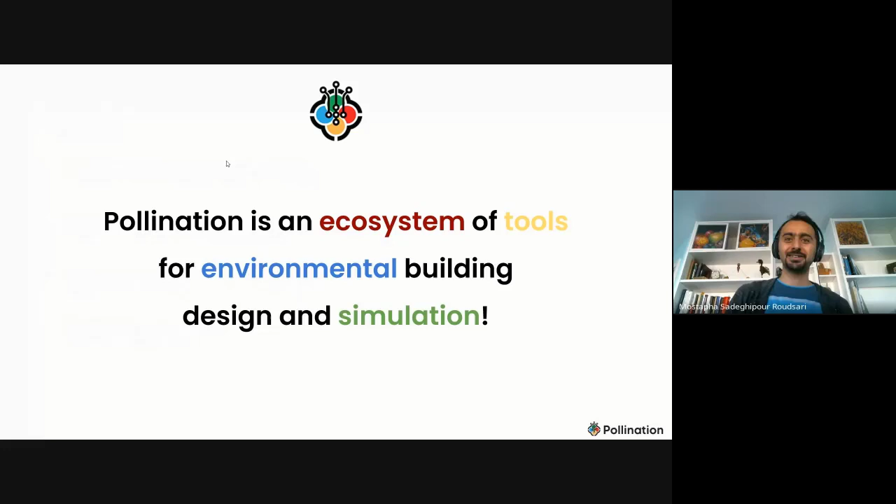With that, what's Pollination? Pollination is an ecosystem of tools that we build for environmental building design and simulation. Why is it important? Because it will help you get from question to actionable data quickly.

Right now, the collaboration is staged—it goes from one person to another person. We have delay, and because of how we collaborate, we're in a process of one or two weeks turnaround from the time you have a question to when you get some data which may or may not be actionable. That's the time that we lose, and that causes most of the issues we have with collaboration.

So how do you resolve that with Pollination? By having Pollination as the hub that you use for collaboration. We've built the whole tool set to help you do that. The way it works now is from the developer side, a consultant develops a unit of logic, which we call a recipe, and it gets deployed to Pollination. From the user side, you basically interact with that recipe using our CAD tools or the web interface.

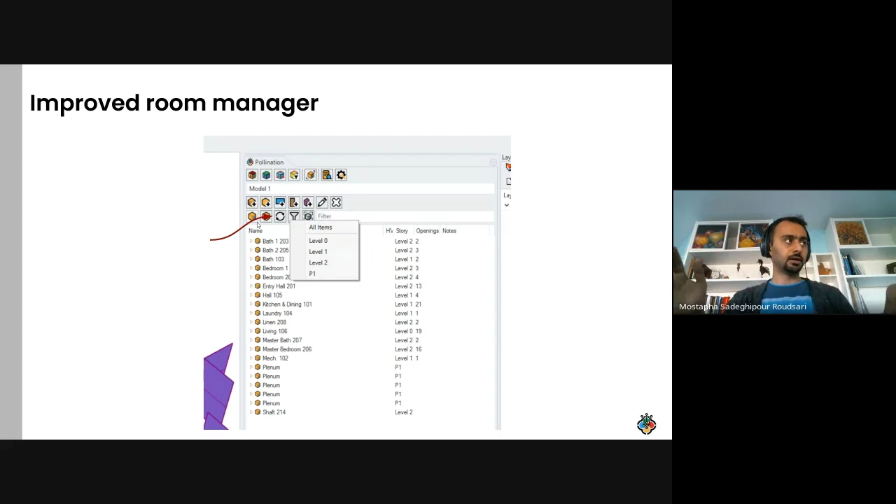The other one is this refresh button that you now have in Room Manager. For larger models, we're still trying to figure out exactly why it happens, but at some point our Room Manager may lose some of the data available in the Rhino model. We are working on that, but until we figure it out for all cases, you have this button to help. You can just refresh, and when you do, it reloads everything from your scene, so you get a clean model in your Room Manager.

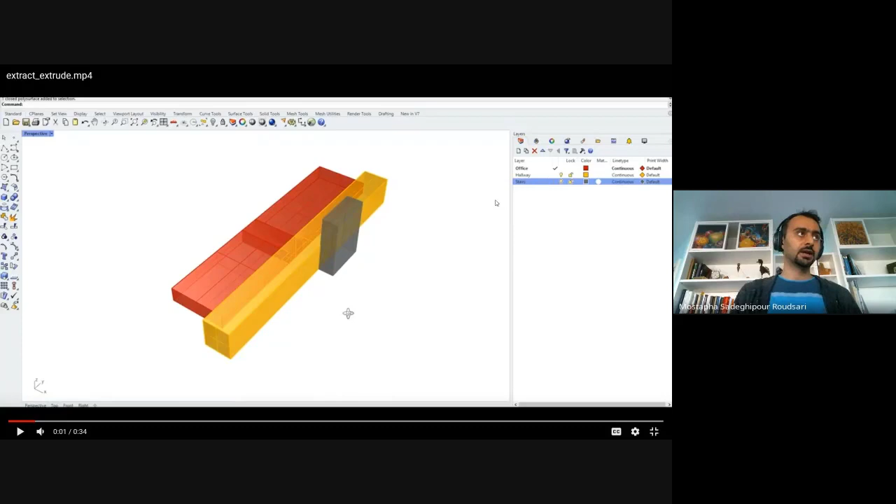Then we developed a 3D to 2D to 3D workflow, if that makes sense. Let me pause to talk about why we developed it. A lot of workflows we see, even with the Revit plugin, involve people modeling their geometries as closed breps and putting them in different layers based on program, like office, hallway, stairs, or someone gives you a model like that. This is very common. The challenge is these 3D models are not good, especially for large models where you usually have issues. And if you want to fix them in 3D, we're finding not everyone is comfortable editing in 3D, and honestly it's hard sometimes to edit things in 3D.

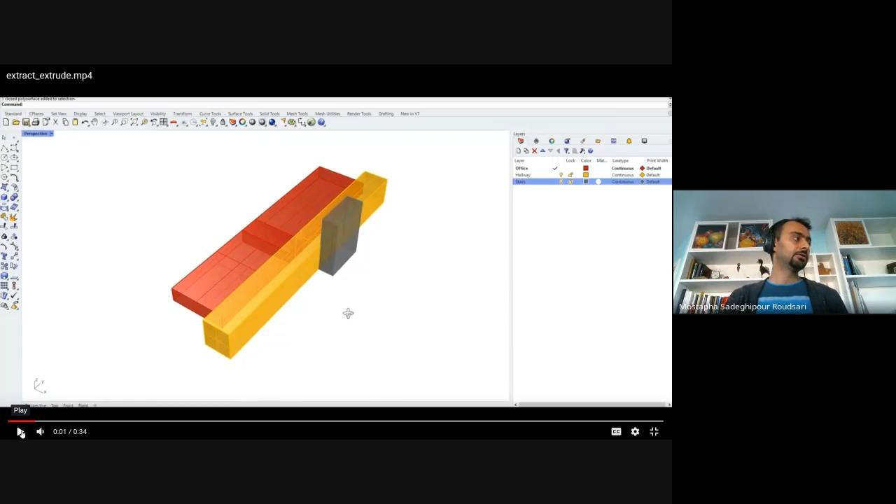So the workflow we developed to make this easier for everyone is a command called PO Extract 2D Plans. What it does, as I just ran it, is take all these breps and extract the curves, creating a curve at the plan for each one. So I just delete them, and now you see all the curves. This is like what you can do in Rhino with an intersection, but the difference is it creates the curves in the same layer as the geometry they came from, so you don't have to do this yourself.

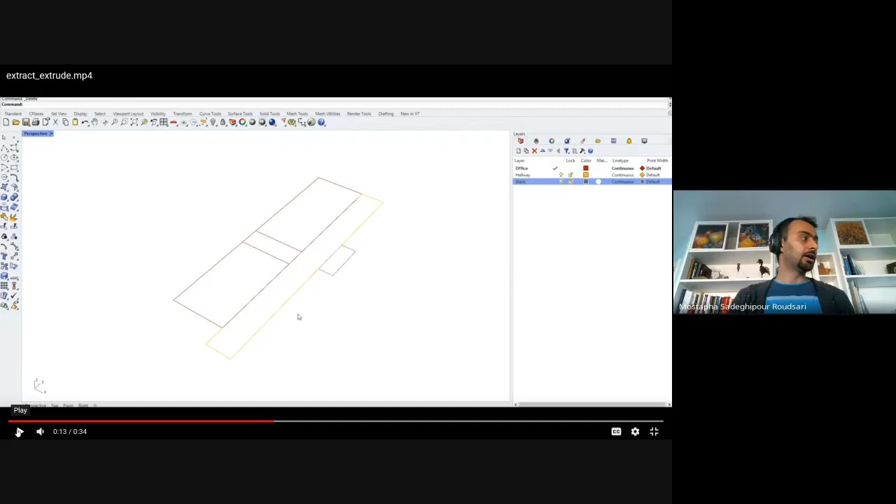You don't lose the relation between the layers of your poly surfaces when they came in and the curves you create. The other good thing is the magic that happens here: when we create these curves, we actually save the data for the height of the brep. So now you can do your editing. I do something very simple, but you can fix the plan.

Once you have it, there's another command called PO Extrude 2D Plans. The difference is, as you see when I ran it, because it knows the height of the original geometry that came in, it basically extrudes everything back to the same height, and in the same layer. So you don't have to do the painful thing of selecting by layer, extruding, selecting the next one by layer, extruding. On large models, I've seen this save up to 30 minutes of time.

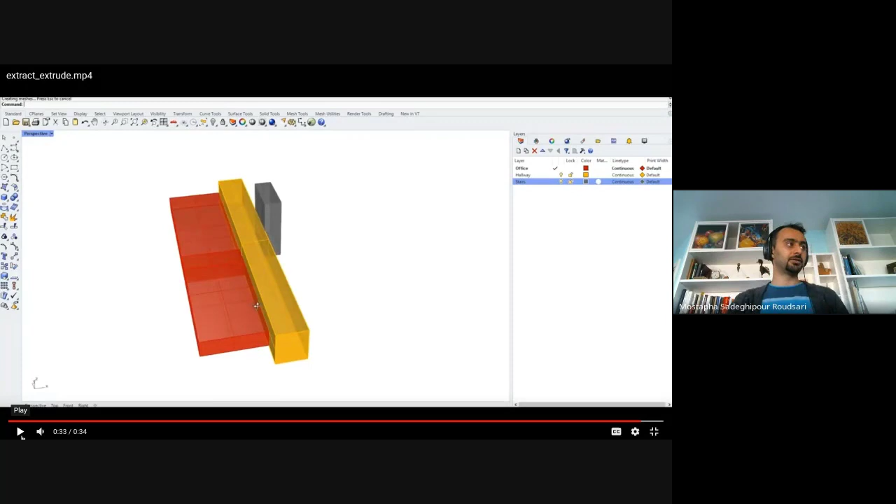Of course, you can do this with Grasshopper, but then you have to know Grasshopper and set it up there. This will make it easy for this workflow.

We're also working on another workflow to make it easier for people to deal with the transition of getting a 3D model that's not clean, going back to 2D to fix the stuff, then going back to 3D. A lot of this comes from workflows that people report to us, so if you have one, please let us know and we'll be happy to consider it.

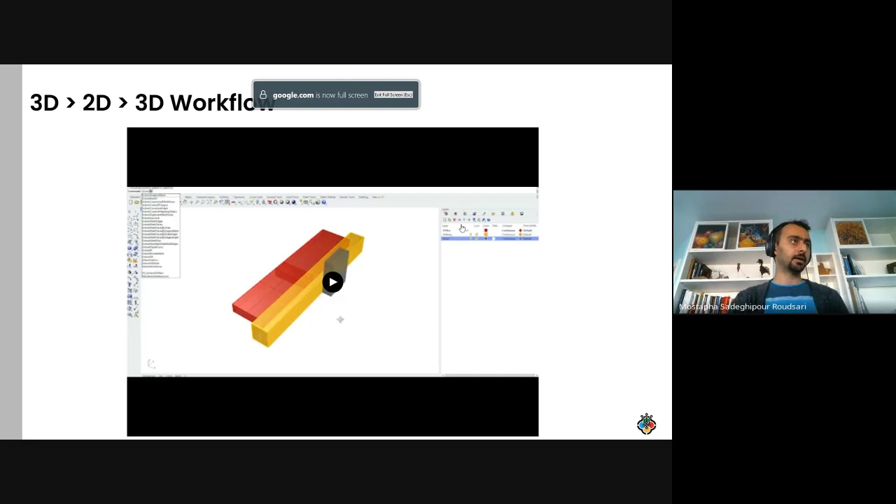Our motto is delivering freedom and flexibility for real world complexity. So if there's anything real world that makes your workflows complex, we'd really like to hear about it and see how we can add that to our plugins.

For the Pollination Revit plugin, we've worked on adding features for better integrated QA/QC during the process. If you've been using the Revit plugin, right now if you wanted to see your HB-JSON model or validate it, you had to export it, either go to Rhino or run it from command line. From now on, you don't need to do that. If you select it, everything happens in this export model tab, starting with a preview feature that's added here.

If you select multiple rooms in your model and then select preview, it will open up a preview window and you see the model in 3D. It's the same preview technology we use on our web app, so as the web app viewer gets better, this will get better too. I'll show a screenshot in a second.

The second feature is the validate button. When you create your model, you can select all your rooms and try to validate it inside Revit. It gives you a report on whether your model is validated or not, and this will save you a lot of time from going all the way to running the simulation just to find out your model isn't validated.

So this is how the preview looks like. You can see this is the HB-JSON preview, and as I said, it's a full-fledged viewer. What I did here, as I usually do quickly, is turn off everything else to check if the aperture is exported correctly from the model.

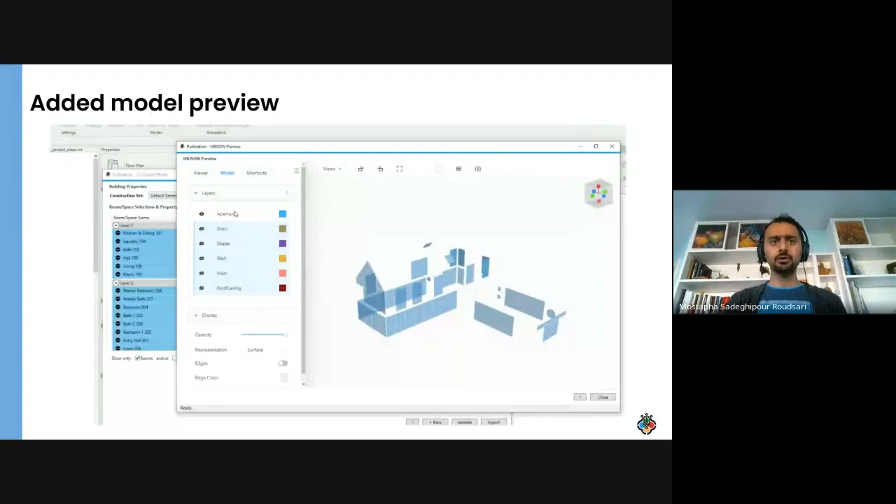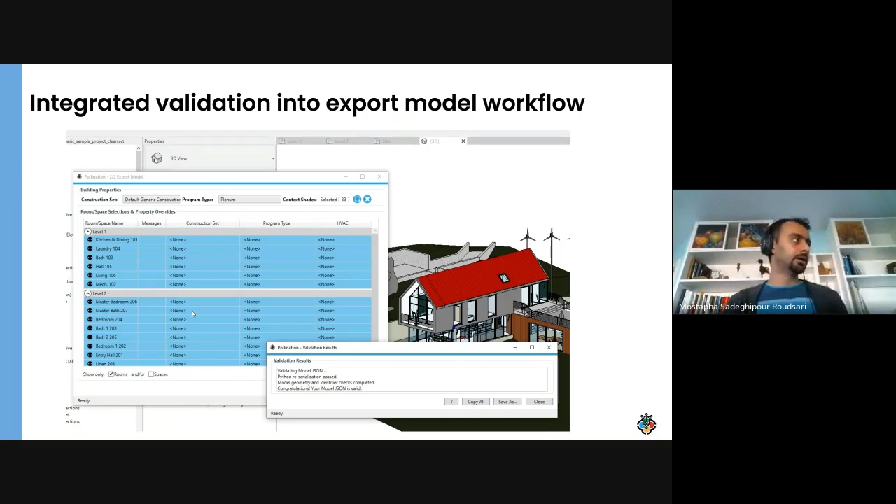And this is the validate button. Make sure you select all the rooms, because otherwise you'll get validation errors for adjacency. If you only select floor 1, for example, and not level 2, and they have adjacency, you'll get a validation error for that. You can ignore it if you understand why. But if you want to check the full model, select everything and validate, and it will tell you if it's validated or not.

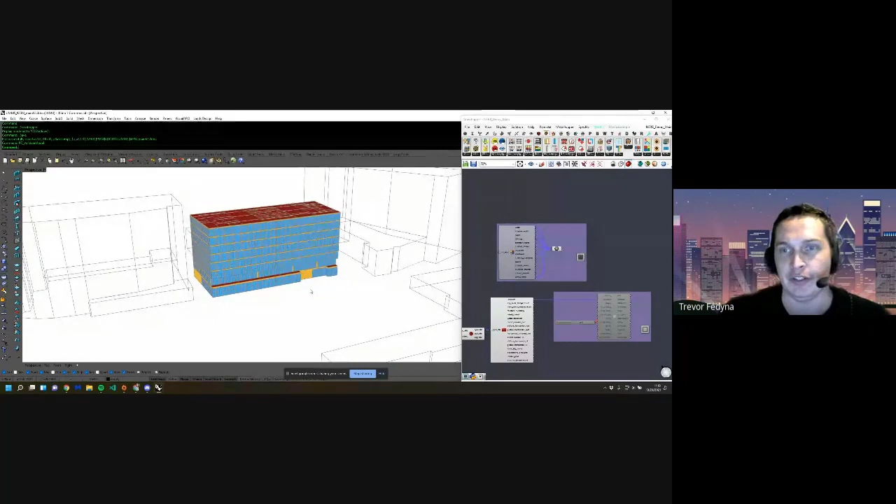Now, I didn't want to create 528 rooms individually. Fortunately, the third level duplicates, so that was able to be accomplished easily.

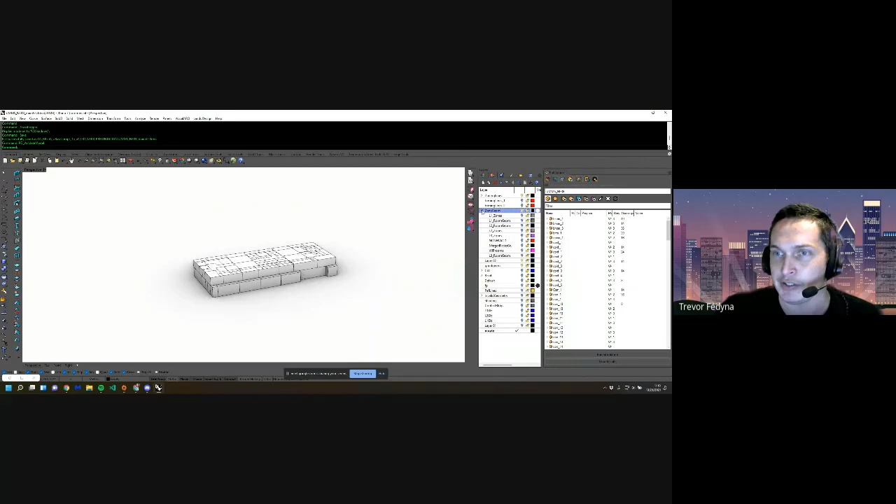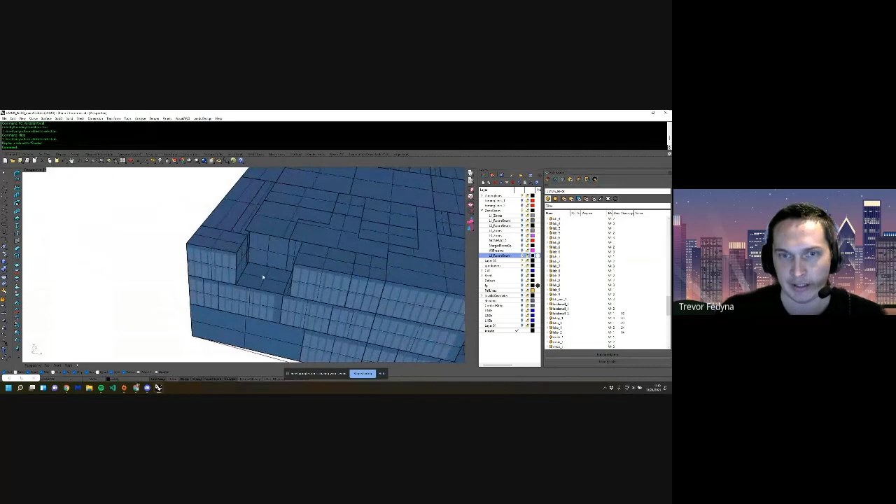One of the things that I really enjoy about the Rhino side Pollination tools are some of the things that allow for the QA/QC. The validate model is awesome, as well as things like just hiding that room right now, that doesn't look right. That's not the right boundary condition, nor is that. So being able to go through the model and double and triple check all these things on a really large, complex model has been awesome, because right away, right now, we're seeing, okay, there's some adjacencies. We got to look into that and see what's going on.

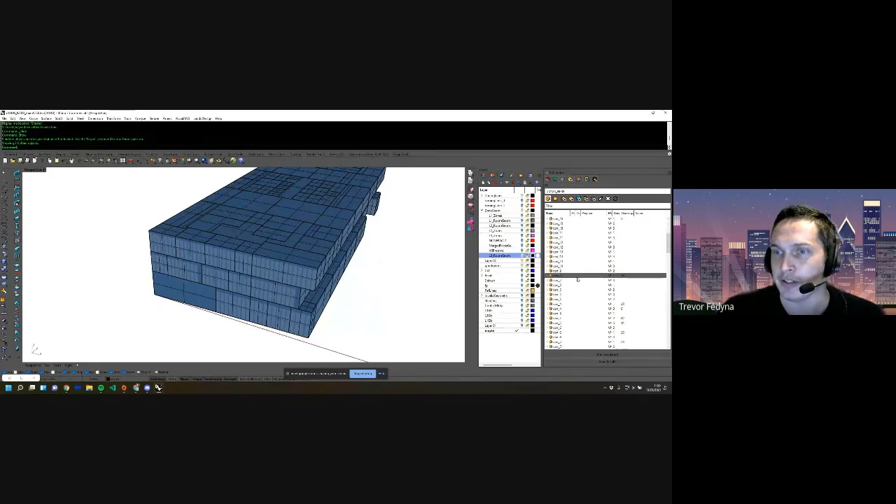So using a naming convention, all of the rooms were named as they are supposed to be to accomplish the task. And then this is my favorite part, being able to pull the Pollination model into Rhino.

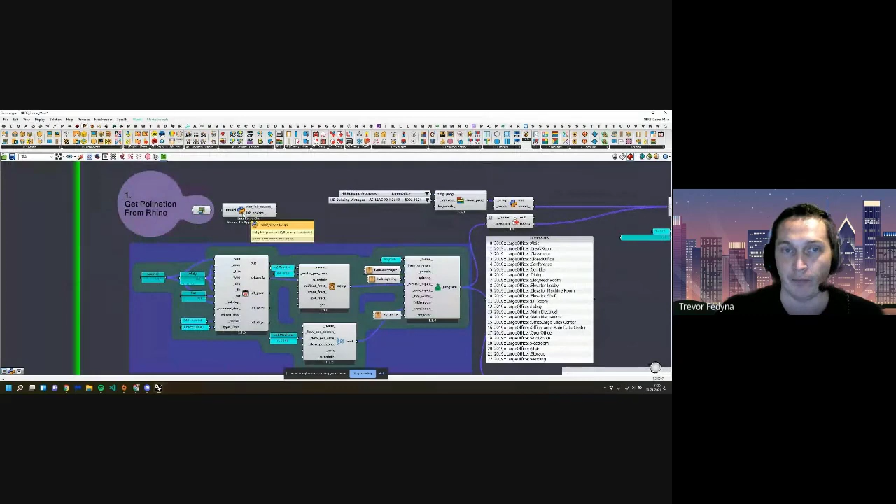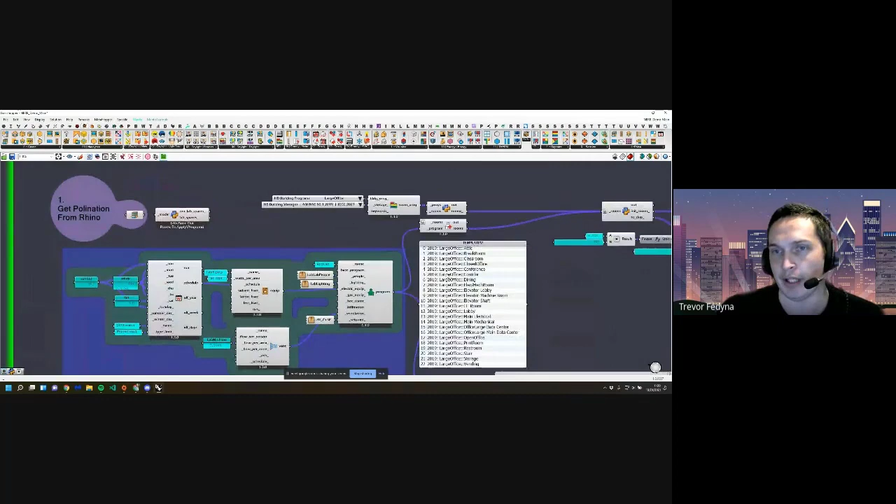I parsed out the lab spaces and the not lab spaces, used the standards library to apply via the naming convention the applicable programs, and then made the lab type program that was required. Putting everything back in here, wrote another little thing, duplicated to parse out the rooms for the third story,

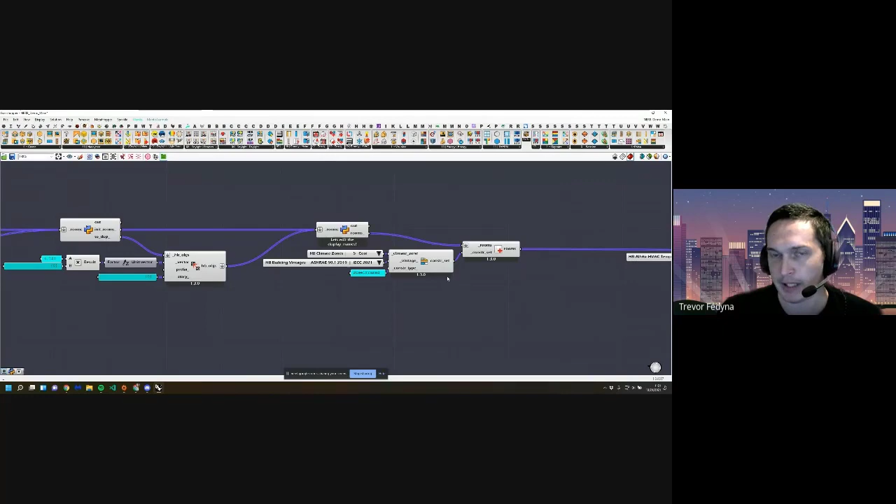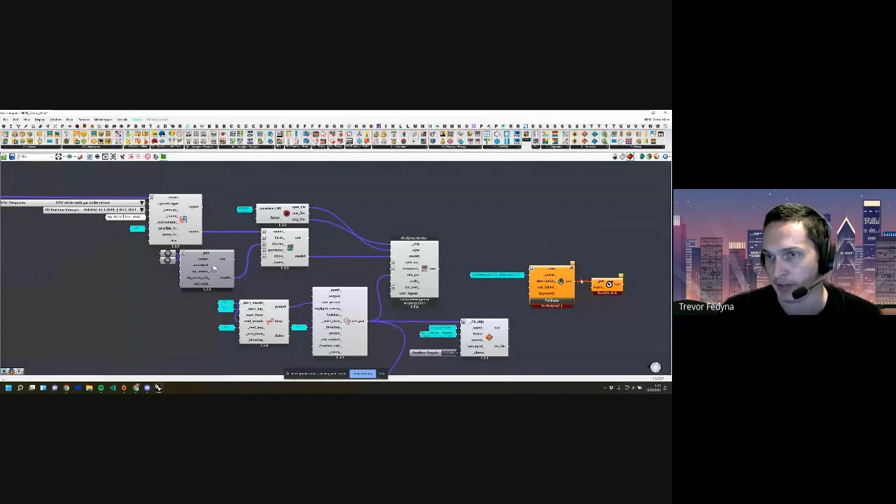duplicating them a number of times to get the rest of our stories, and carrying on with the naming convention, adding a level to the end of the display name, applying the baseline construction set and HVAC system into the model, and then being able to do that relatively quickly and then throw it up on the cloud to have that model running. That then, to me, enables taking that same model and then going and working on the proposed model's HVAC system with Ironbug, which is super cool.

Yeah, I don't think 30 minutes is a lot. That went faster than I thought. Sorry.

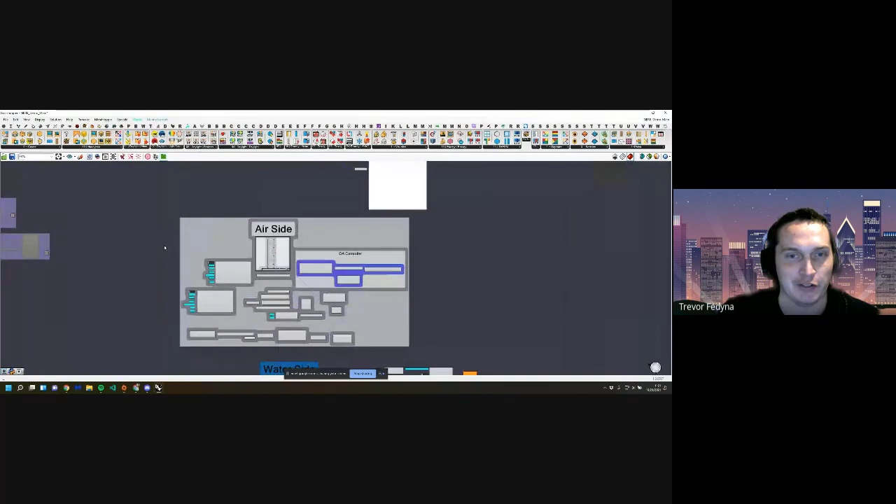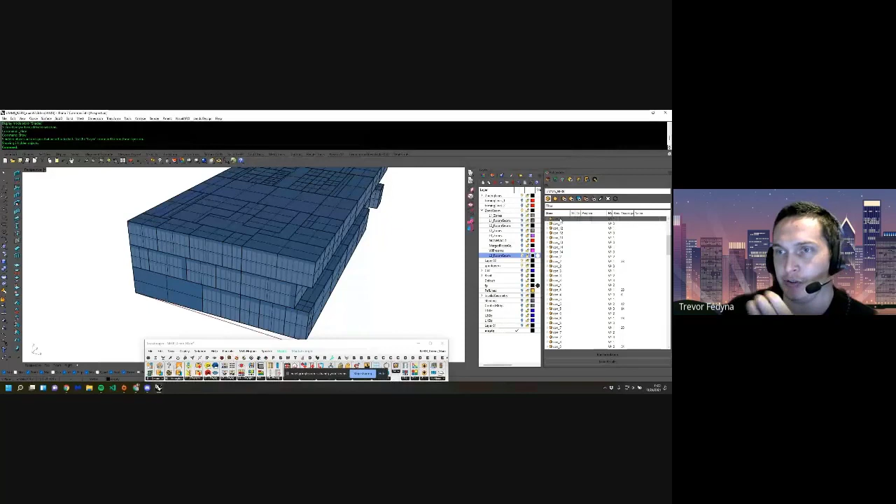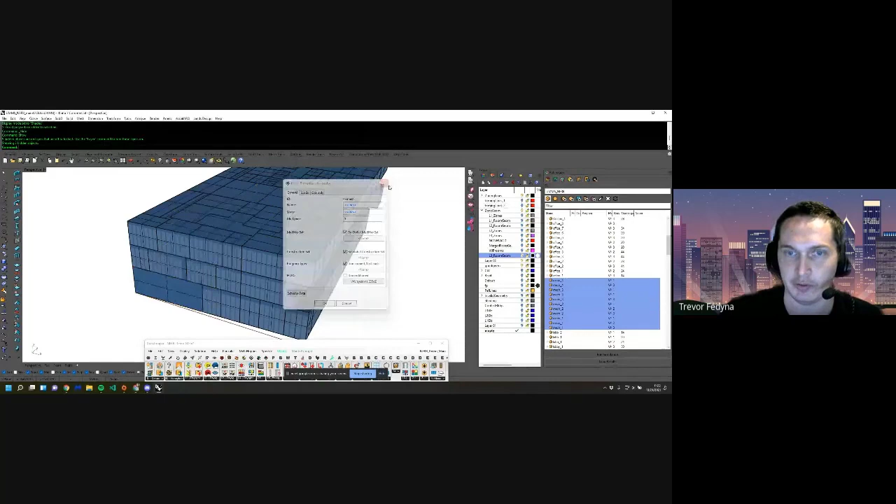You're just being able to quickly make a large model and having multiple different ways of applying all of the various entries, whereas you can sort with the name, select all of your named rooms, and then in here you can apply all of your loads and controls for those zones. Also having the ability to do so in Grasshopper, send it up to the cloud, rebake the additional rooms that have been made.

I've used Design Builder, Open Studio by itself, Energy Plus via the IDF EP-Launch and the NREL's, I forget what it's called, their graphic user interface for drawing the buildings, and SketchUp. Just the level of extensibility, customization, and things being open source, so you can plug into the SDK and automate things the way that you want to. With this tool set, to me, is the best way to go about using Energy Plus and Open Studio.

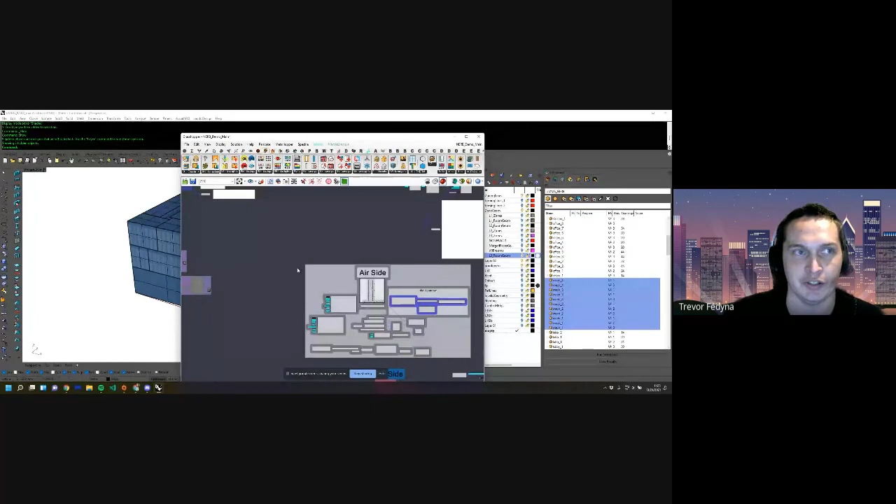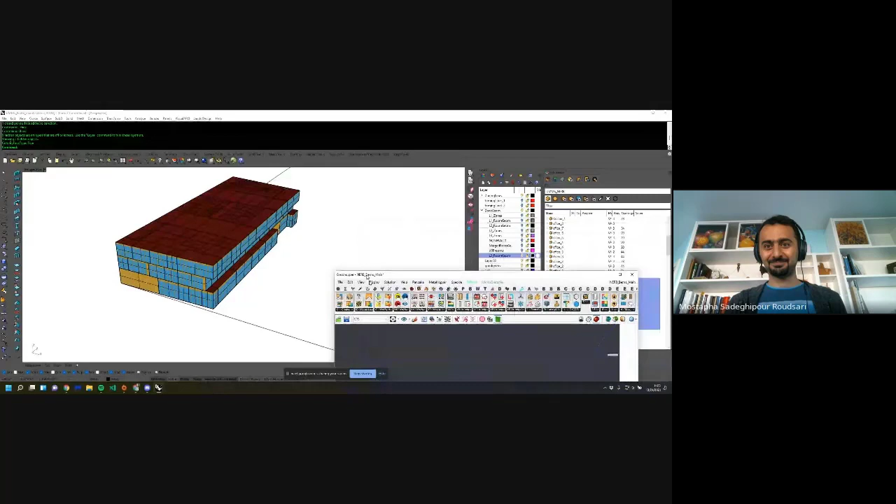And I think... can I ask a question about the model? Oh, actually, we can write this. Okay, maybe I do the same thing, I just type my question. Or someone has a question, like John Key can take over that. I'll just type my question like everyone else. Okay, thanks, Mostapha. Trevor, did you want to finish that thought? I think I'm good. I think okay, I'm just going to awesome, continue to say random stuff.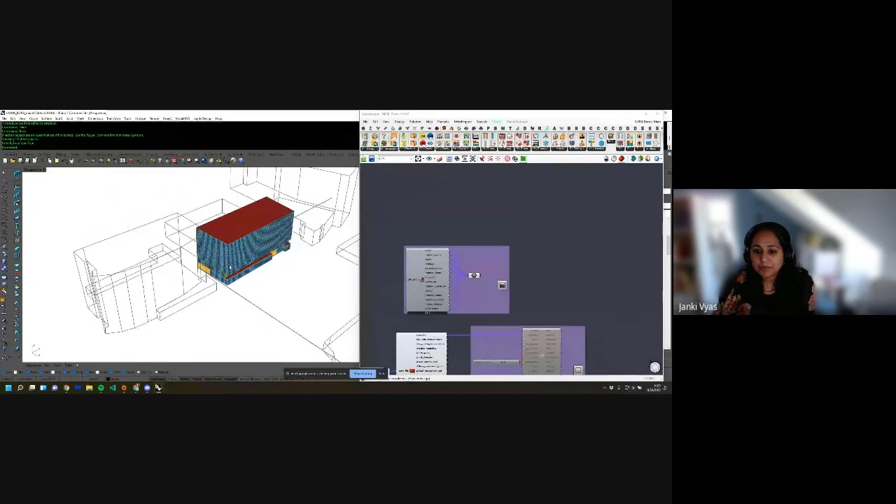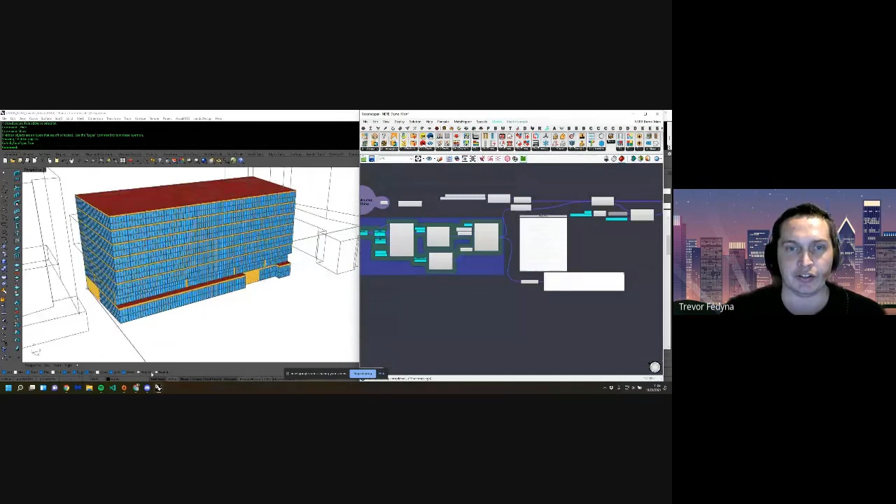So Brett has a question where he's asking, were you able to generate an automated report to showcase the results for your client? And so were you able to bring down the report from our web platform where you can download it as an HTML? I did earlier with one of the cloud simulations I ran to do some validation on a couple things. That is super cool, being able to just download from the cloud.

The cloud in general is one of my favorite parts, the Pollination.app, because using like Design Builder or other kinds of Energy Plus, I've previously been making a bunch of virtual machines and all that to free up my bare metal to be able to run really large EMS heavy simulations. And it's all quite crunchy and not very streamlined, but Pollination's kind of super awesome because it takes care of all that for you.

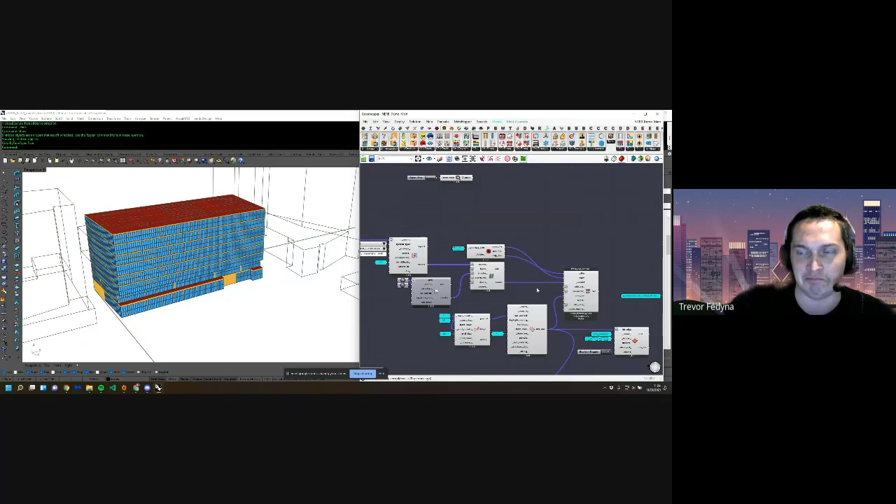Are you able to share what that report looks like, or is that something we can't show? These numbers are not real numbers - this was part of validation work I was doing for a case study, so all the results you see are not real data.

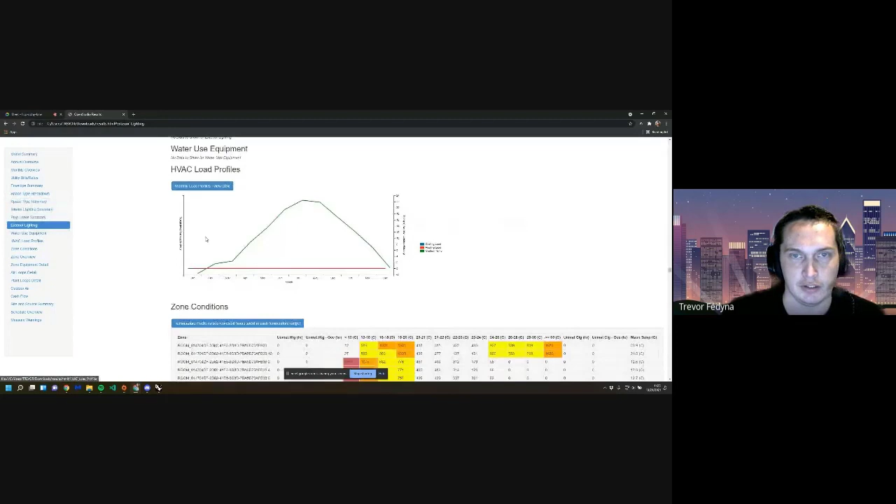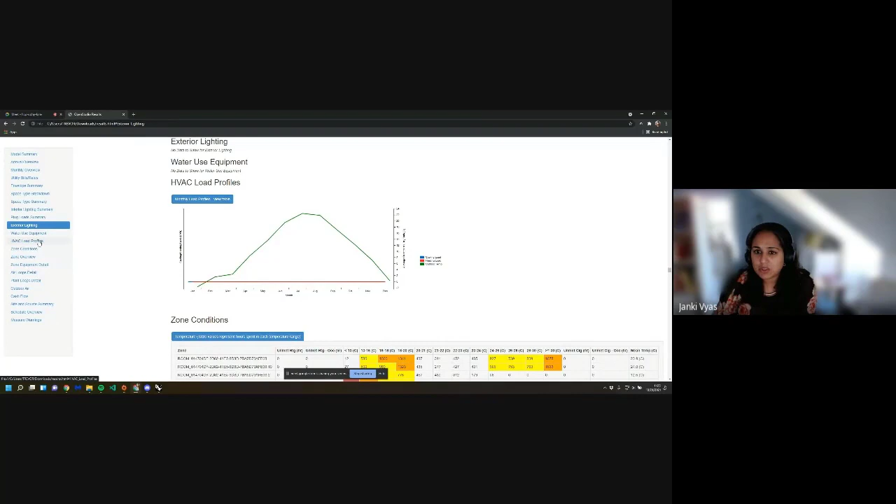The space type summary - this was a feature we just added last month, the ability to export this report. Chris, maybe you can talk about it. It's essentially an OpenStudio measure that NREL originally developed to produce these nice searchable reports for various objects, but we're probably going to continue making improvements.

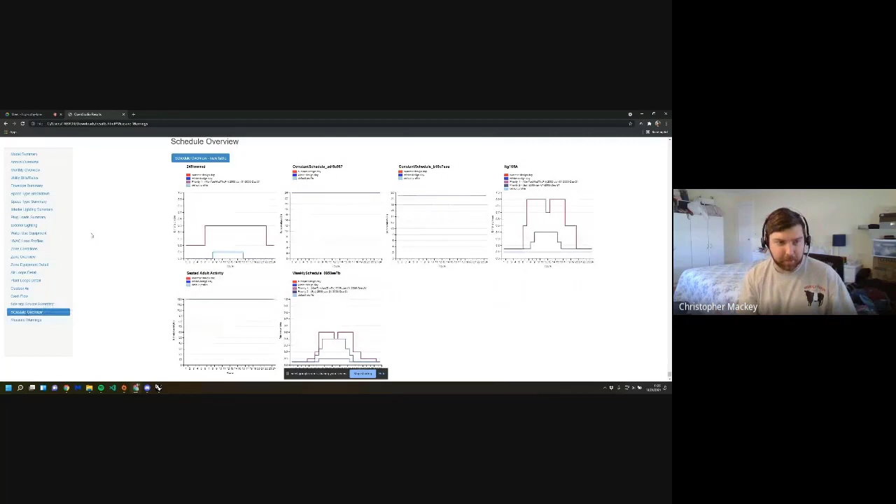One of the questions last month was about the ability to customize this and change the graphics, so anticipating that change in the future. We do have other things in the works for really customizable visualizations, but we'll try to streamline these automated reports, which will hopefully address a good fraction of cases for when you just need to know your EUI and the breakdown by rooms or zones.

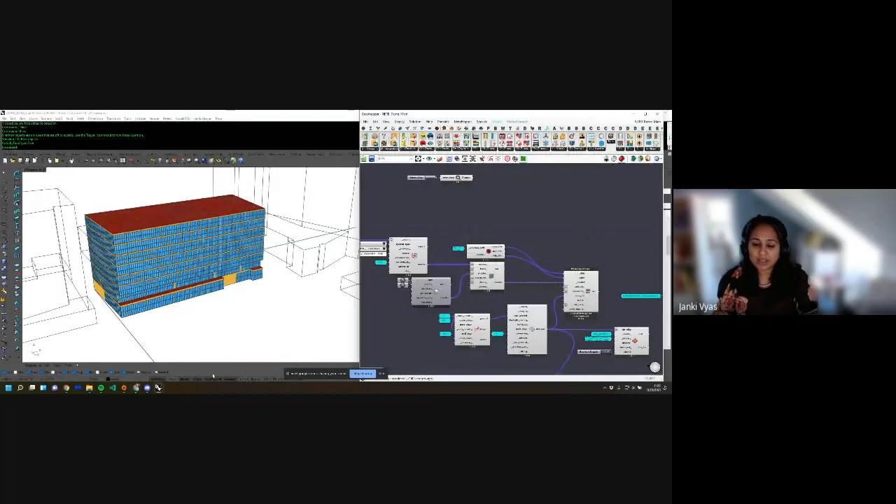Awesome, thanks. We're getting a lot of questions, which is great. So I'll switch to Mustafa's question: how did you create the input model, Trevor? Is it imported from Revit, or did you draw it all in Rhino?

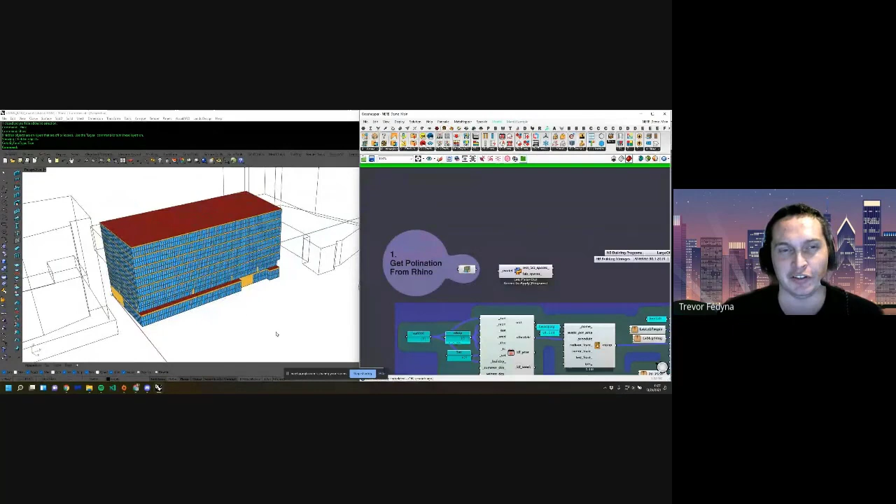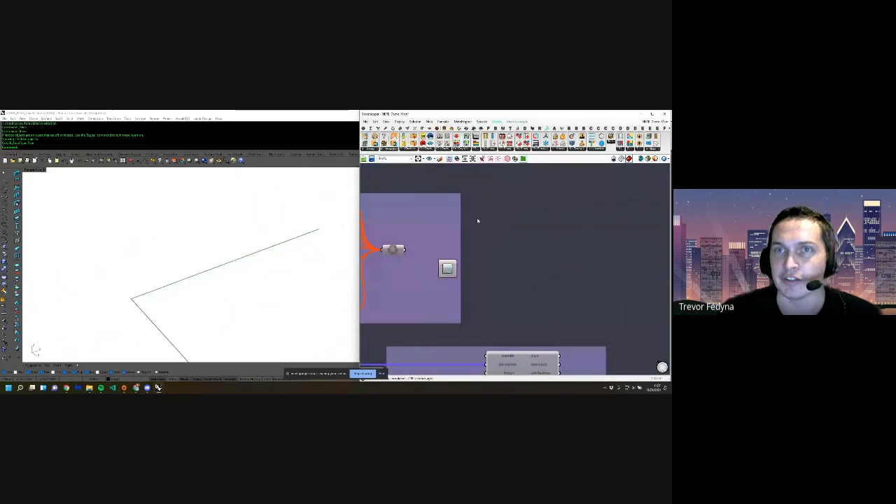I took a couple days to figure out how I wanted to do this model. I ended up not using the Revit side tools, just because I was a little afraid of Revit getting me off track timeline-wise. What I did do was import the zoning lines with Rhino Inside to have that 2D reference to trace over and use as a reference for doing the geometry.

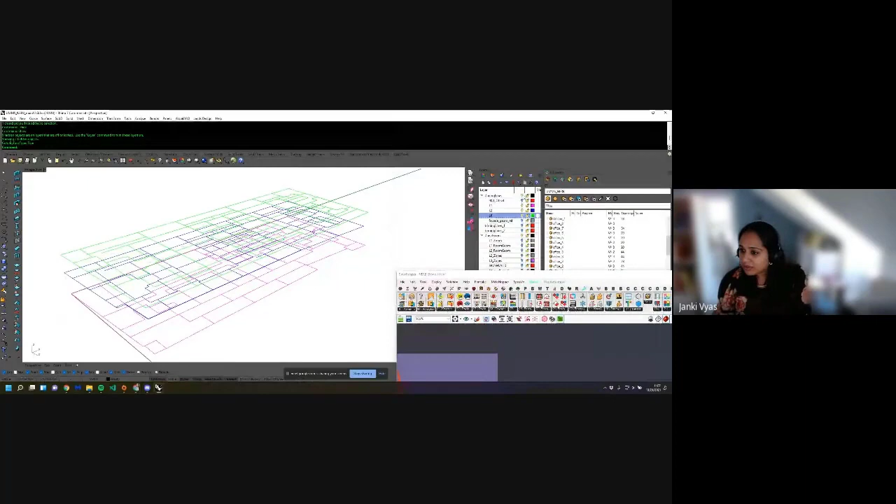So, switching a bit - once you actually built the model, how long did it take for the simulation compared to the time you took to prepare the model? It took me a lot longer to put the model together than it takes for the simulation to run. The geometry always takes the longest for me - thanks to everybody who helped out with that. That's always the big thing, creating the clean analytical model - it takes a whole lot more time than running the simulation.

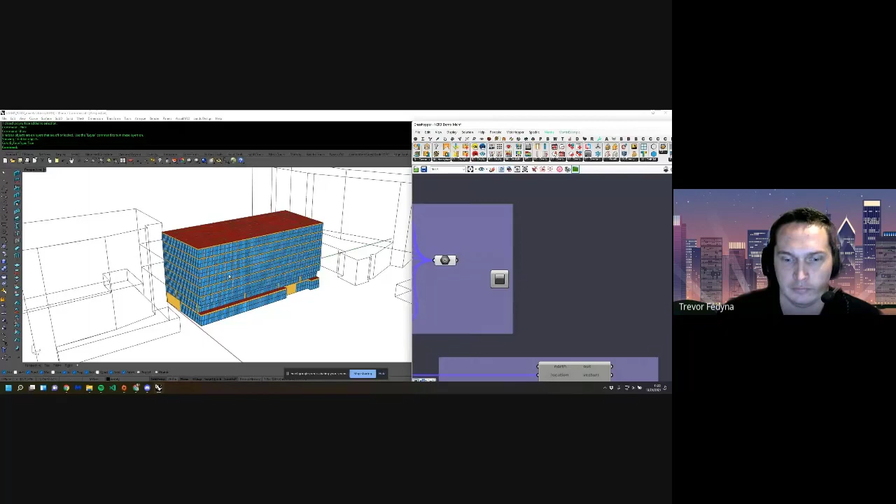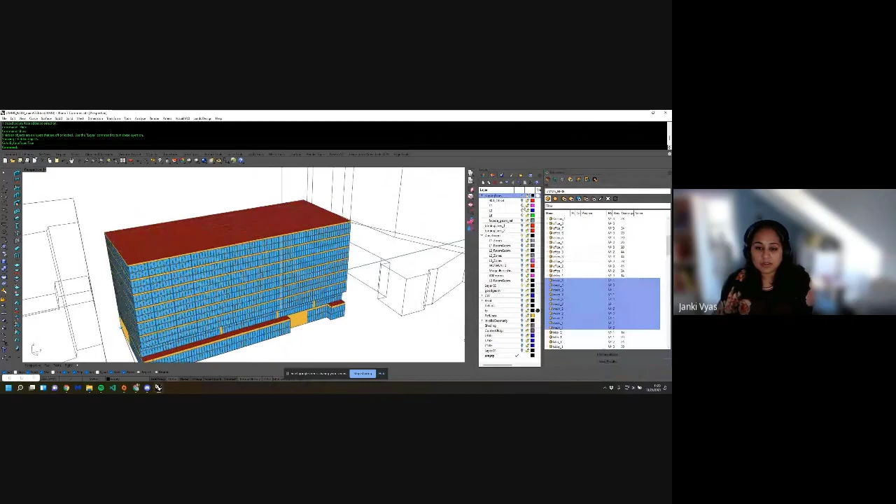As you were simulating and using this workflow, did you run into any geometry issues or errors? Were you able to mostly avoid those by using the validate and check spaces and adjacency features? That's a question from Ed.

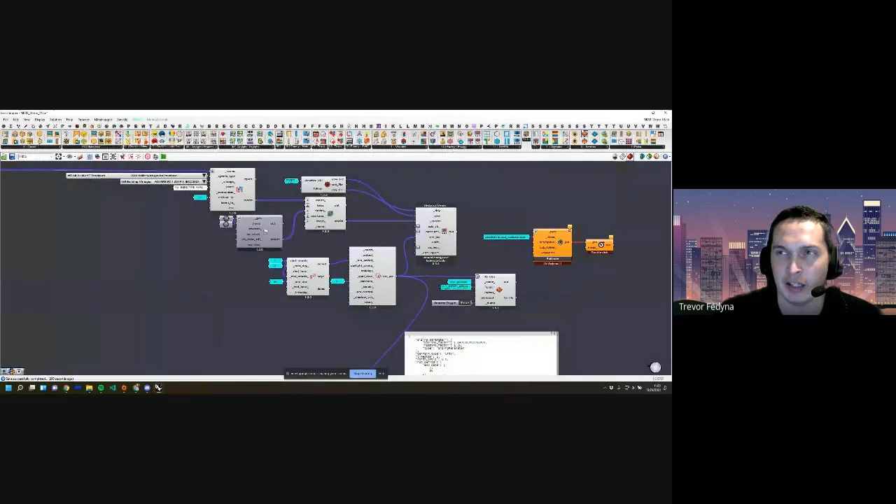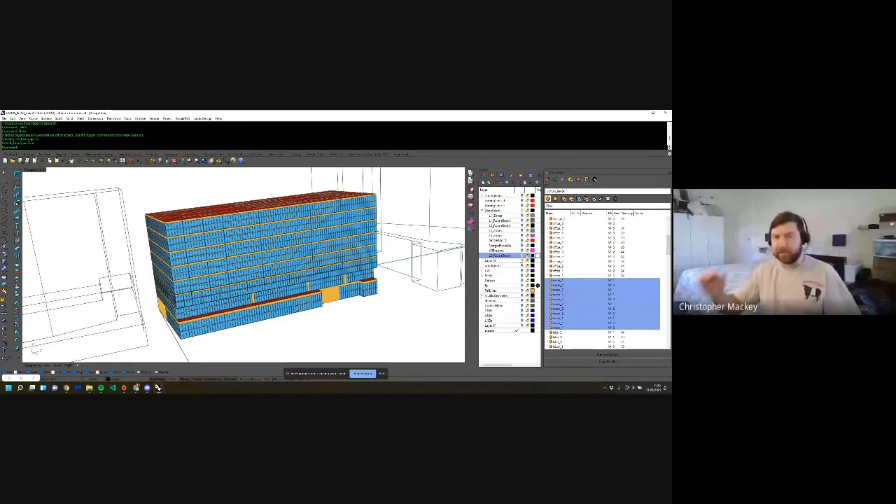I had a couple things - there was some issue where the model would validate, but when I'd try to run it in OpenStudio on the Honeybee side, I was getting some geometry errors. But if I remember correctly, Chris fixed that. Otherwise, the validation and all the other geometry tools were working really awesome. Yeah, that's correct - there was just a tolerance issue that we've recently patched within the recipes and the OpenStudio component.

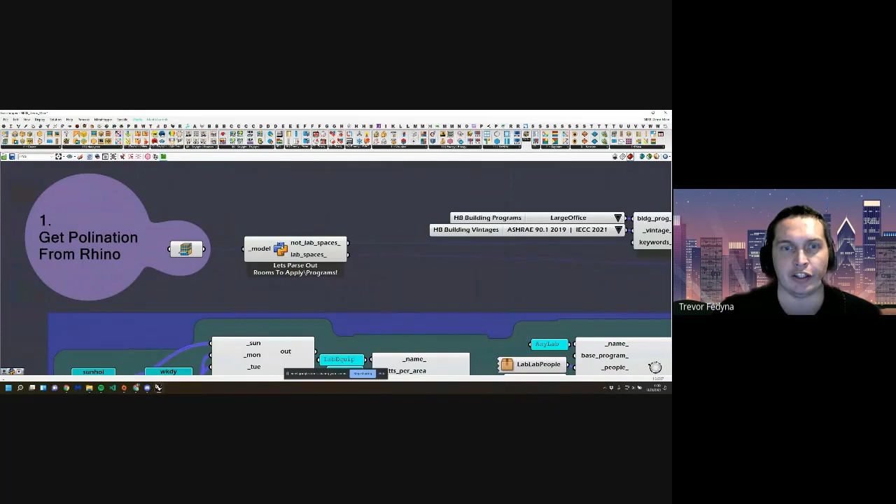Chris had a question in the audience - he was wondering about your Grasshopper definitions. It looks like you're using some custom Python code. Are you able to elaborate on what that's doing and how it integrates with the Pollination components? Definitely - I'm not doing anything very Pollination-related in the Grasshopper components.

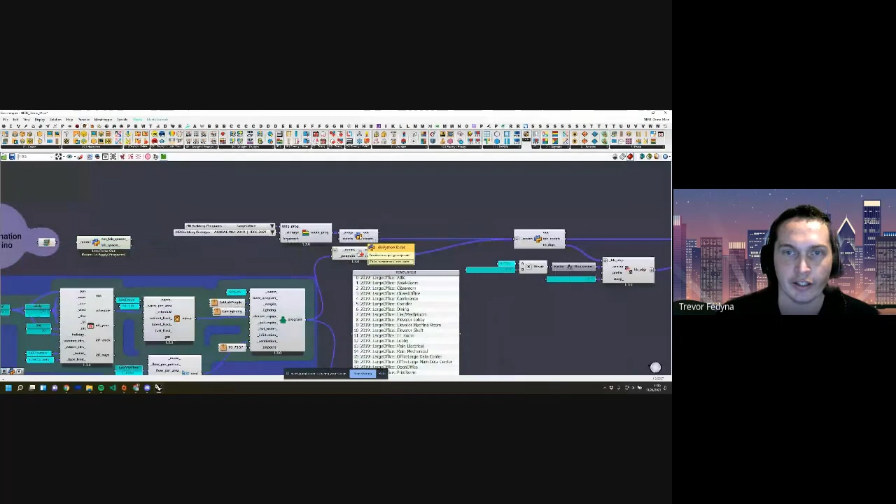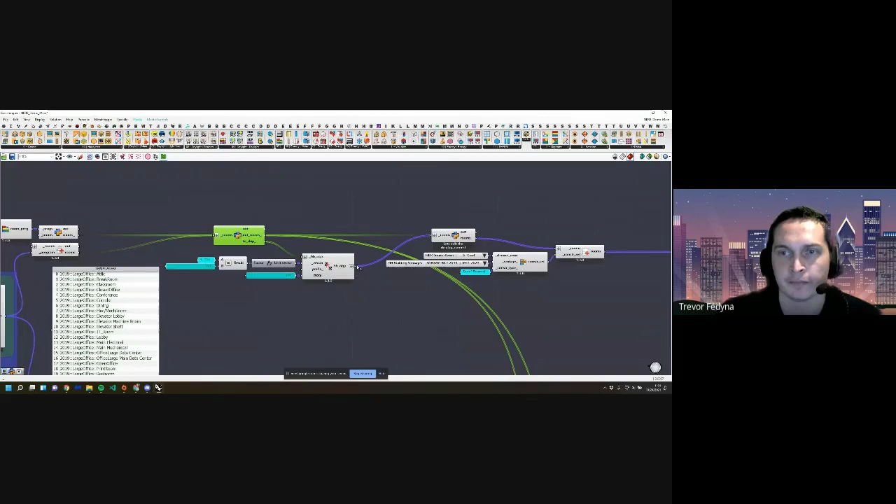It's mostly just Honeybee and Ladybug Tools SDK. In this initial one, we're just getting two outputs that sort the rooms by the naming convention. Over here, it's a bunch of if-elif statements just to apply the programs by that naming convention as well. Going over to here, it's pretty simply just sorting out rooms on the third story to then plug into the Honeybee move object to provide duplication for the repeating stories, and then here, just appending the story to the display names.

And I think that was the last one so far. Awesome. Chris, I see you nodding your head there. Was there something you wanted to add? You're smiling too.

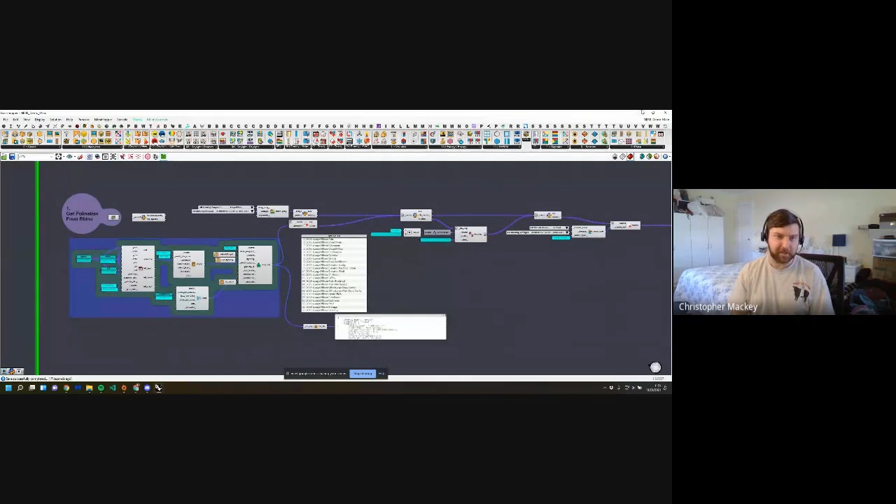I guess I want to ask, has it been smooth to jump between the Python interface, Grasshopper, or Rhino? Is that kind of flexibility to take the model into these different types of interfaces there? It seems like you're making use of all of them, which is wonderful to see. My favorite thing Ed actually showed me how to do is get the honeybee model into a Jupyter notebook and then do stuff to it from there. It's kind of my favorite.

Awesome. So speaking of all of the plugins, Mustafa had a question. Given that you didn't really use the Revit plugin as much, what would change your mind about using it? Is it something on the software side, or would you say it's just the modeling that you encounter in Revit?

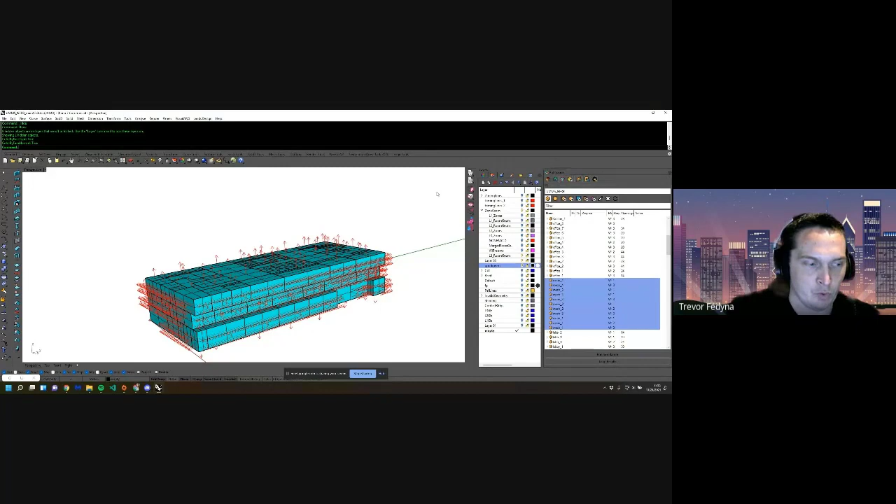I think that Revit's kind of scary. And I think this was just too big of a model, too complex of a model for me to have felt like doing at first with the Revit side tools. I definitely intend to do this model with the Revit side tools, because this is kind of just going to be a project that's going to be used for myself and people I work with to test things out, and kind of use as the baseline for - this is about the scope and scale that is like normal day-to-day easy day stuff for BR plus A. They wouldn't blink at something like this, so we're definitely going to be doing that next, but I was a little daunted just by how complex the Revit model itself was.

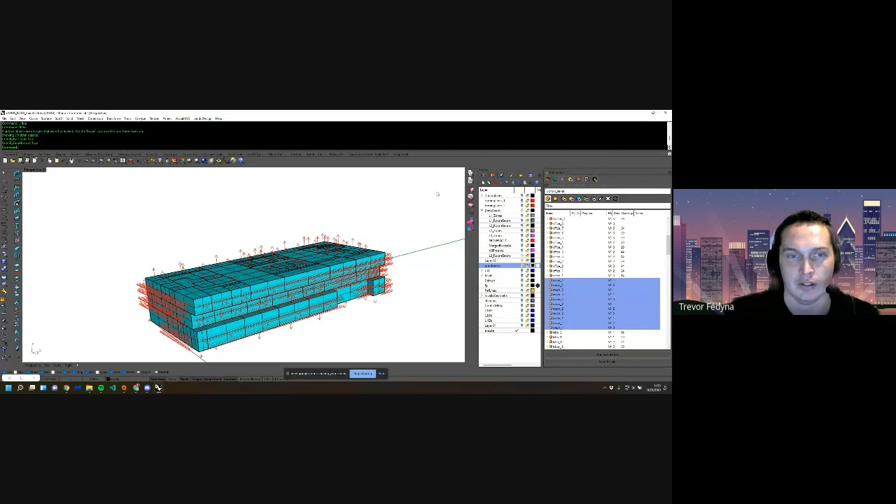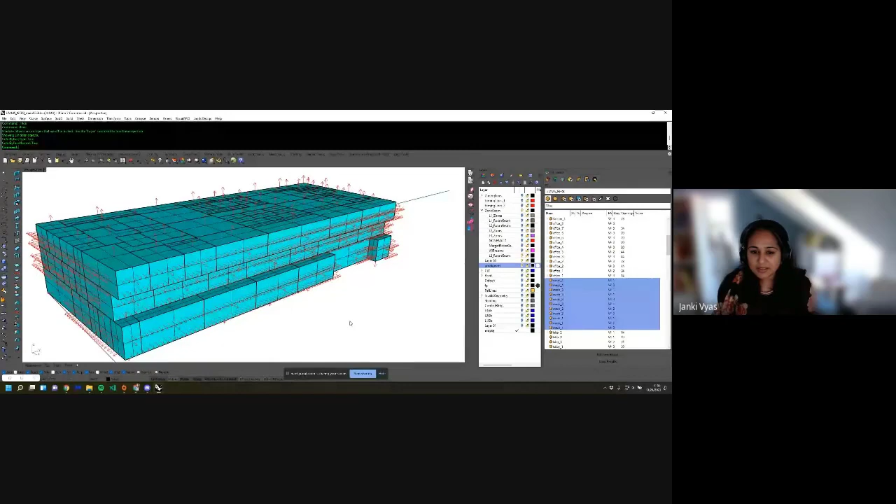That makes sense. I know as soon as you said you were exporting things to Jupyter Notebook, my initial instinct was, hey, can we see that? And Nick actually also shared, is that something you are able to share? Or if not, that's fine, I'm just curious. It would take me probably 10 minutes to find a good example of that right now.

We'll go to the next question, which was from Richa. She's asking if you geo-referenced the model.

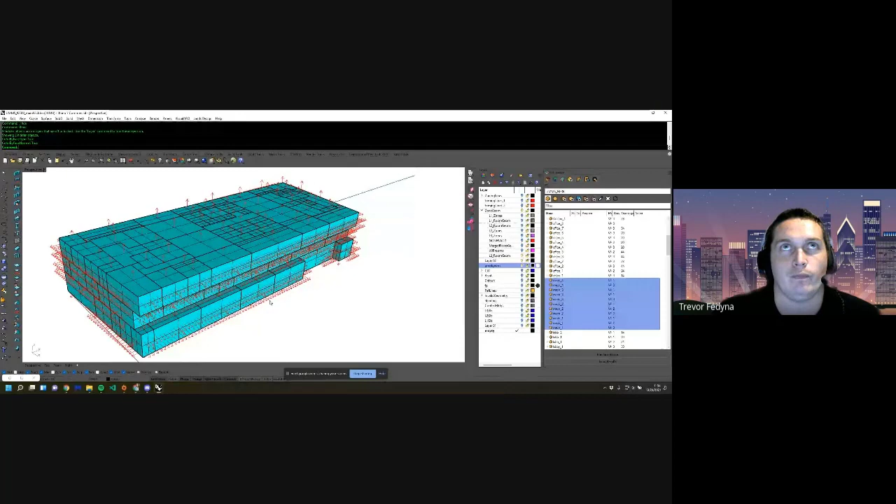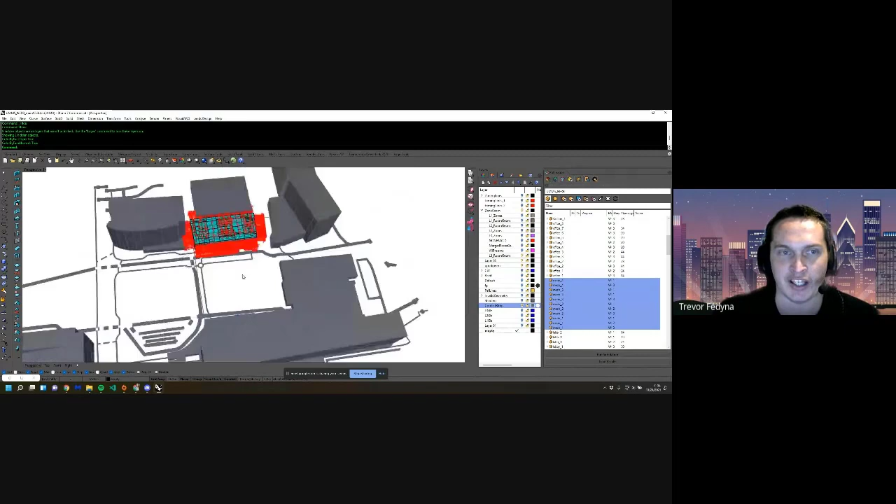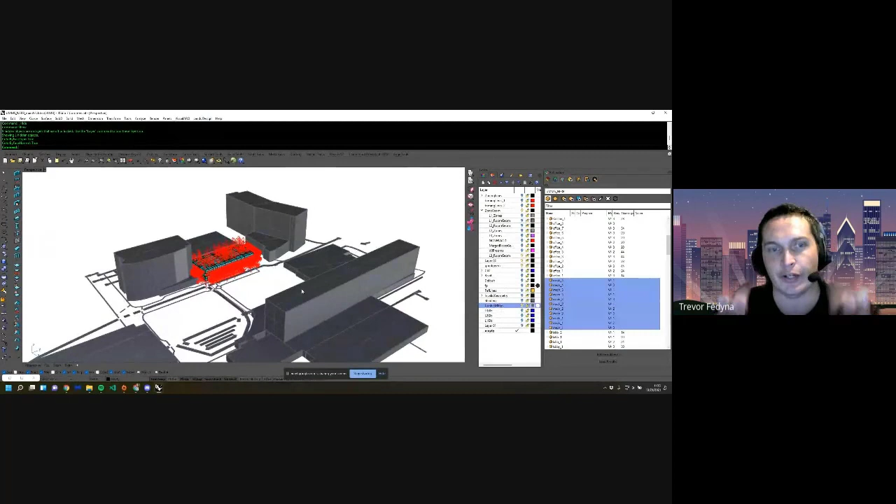In terms of the orientation of the building and the context buildings and all that, I went on to OpenStreetMaps - there's an OSM to World or something, I think it's called - where you can get at least the footprints and some general geometry of that. Then using the site plan, I plopped everything down, got the orientation of north, south, east, west all lined up, and then further detailed some of the heights of the buildings, which weren't right coming out of OpenStreetMaps. So just a little bit of editing to get the context correct, if that answers the question.

Yeah, Richa, did that answer your question? You can unmute yourself, you don't have to. Yeah. Hi Trevor, hi Janki, hi Mustafa, and everyone.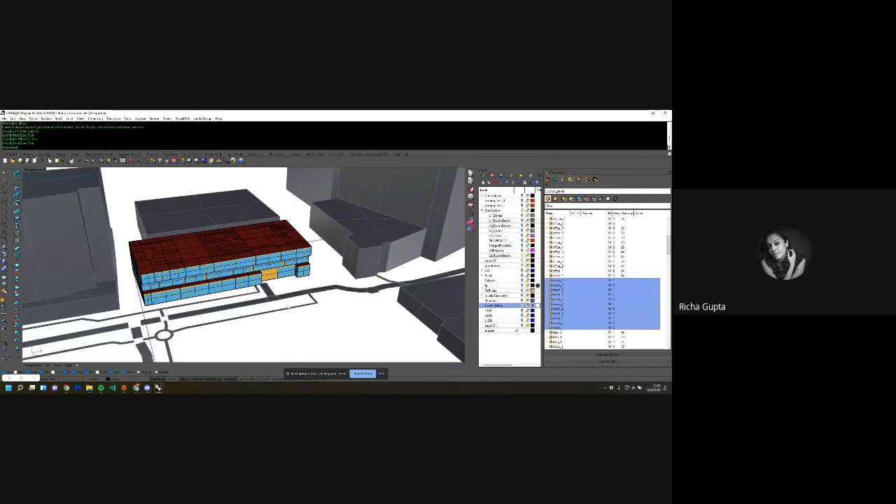So yeah, I guess we'll use OpenStreetMap to georeference it, and then we can align and do the simulations, right? Was that a question? Yeah, just to cross check - is this how we are supposed to do it?

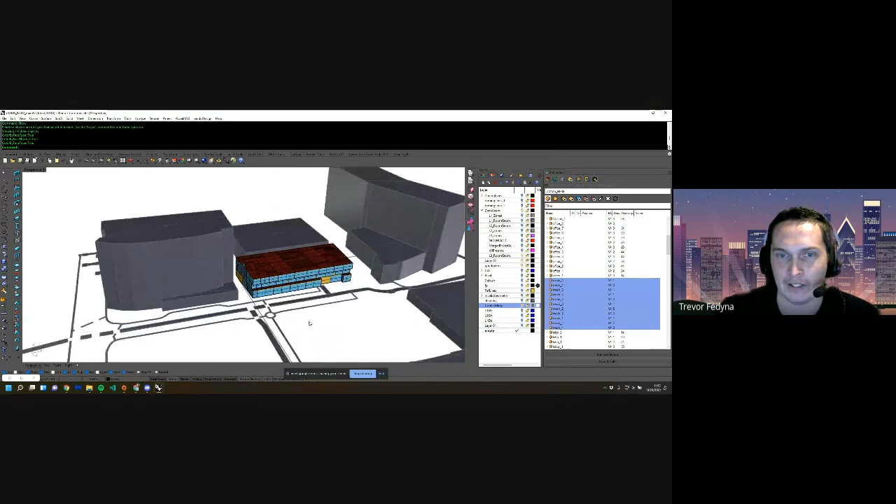That's just what I happen to do because I like to make really complex models with tons of context shading, way more complicated than it probably needs to be, because all of these additional faces are going to add runtime to the simulation. But that is a way that you can do it, if that makes sense.

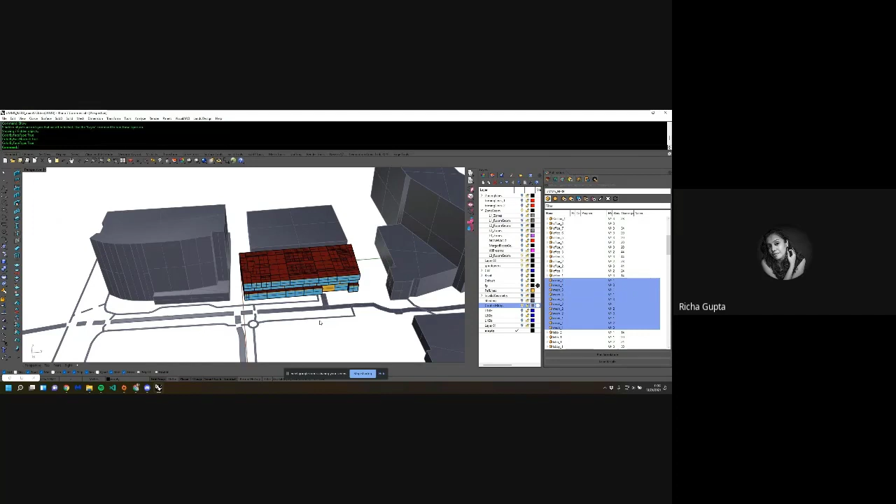So for me, what my usage for Pollination is that I want to use it in urban planning, and there it is very much required that we use georeferenced stuff, and specifically the map should be properly aligned so we can just see the before and after. So in that case, what do you guys suggest that we should use?

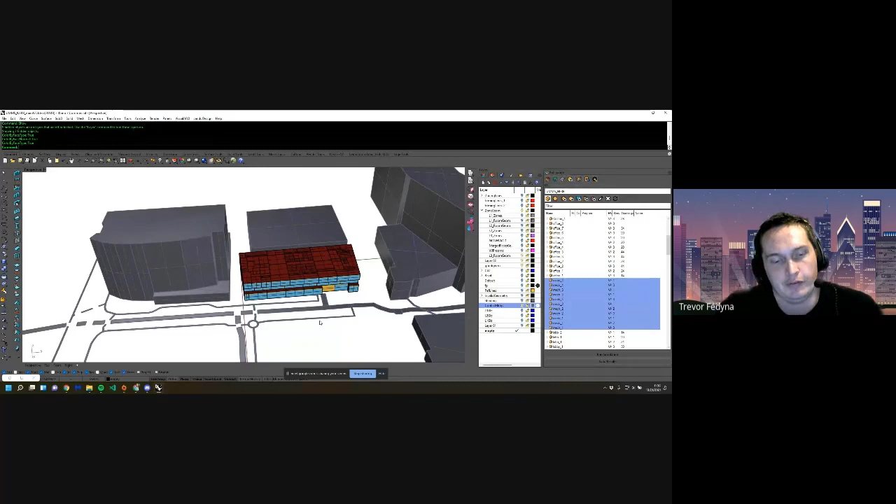There's a couple of, depending upon what kind of GIS software you're using, Grasshopper plugins that allow for bringing GIS data in that I feel like would be pretty complementary to Dragonfly and also Pollination. But what does everybody else think? Chris or Mostapha, do you have anything to add on how the GIS functionalities work? I think Chris can talk for Dragonfly - we have support for GeoJSON to import, but I want Chris to add more.

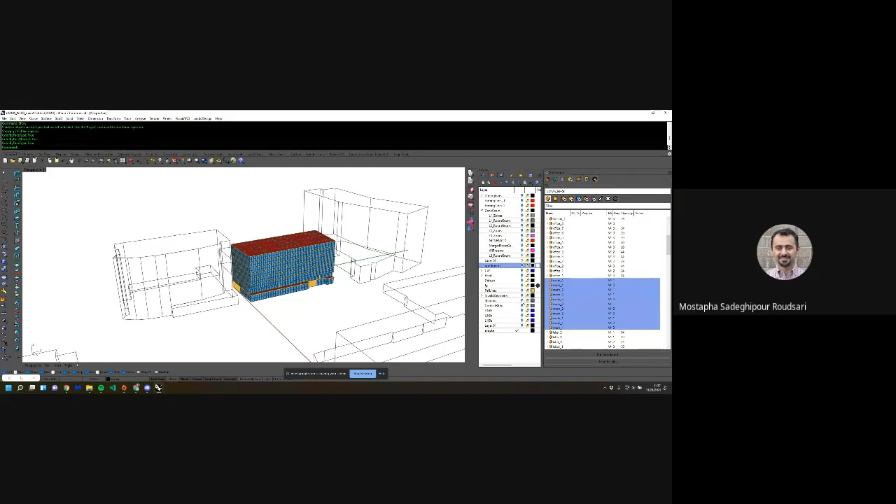I wanted to ask, can we add a poll to know how many people think importing the context should be part of the Rhino plugin? Do you want it automated? I've seen people make a big deal out of context being generated, and in the Grasshopper world, if you know how to do it, it's very straightforward. But if it's something you think will help your workflows, we could build it into the Rhino plugin using OpenStreetMap to generate extruded context like that for you. Maybe we should have a poll and see what people think.

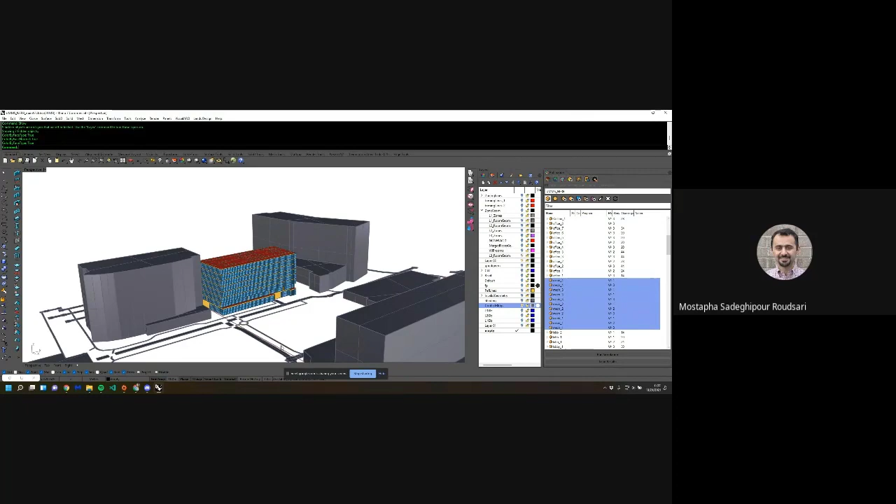Yeah, I'm launching it now. So if you go to that corner icon with the triangle, square, and circle, the poll is launched there, so you can go ahead and answer on the audience side what would be helpful if context is also imported.

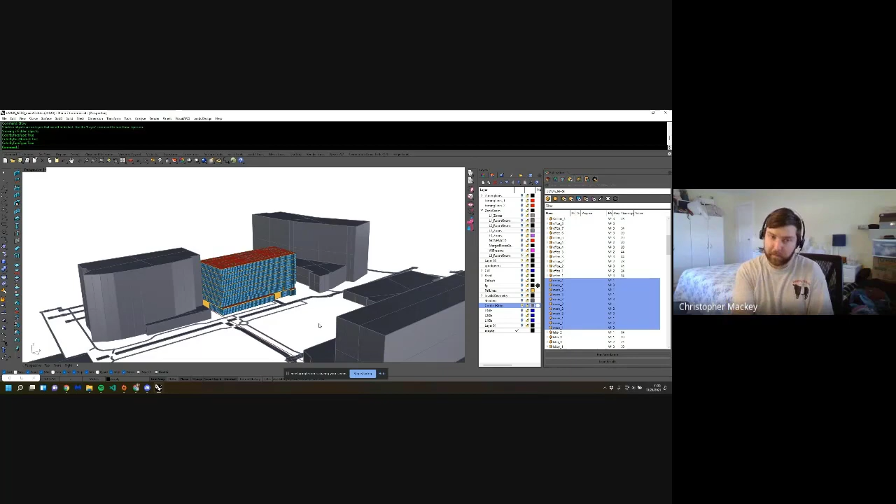And while everyone's answering, I'll add that we do have Grasshopper components that import your GeoJSON into a simulatable Dragonfly model, which can then be imported with the Rhino plugin. We even have a recipe on Pollination that takes a GeoJSON as input, so you can assign properties like HVAC systems to each building footprint and use those to create an energy model, or at least a bare-bones model from the building type and HVAC system templates. So we do have ways of integrating well with those GeoJSON data sets. This is a very good question, Mostapha, I'm glad you brought it up.

Awesome, so it looks like we might be transitioning to questions about the Pollination platform. But before we do that, does anyone have any more questions for Trevor? He's got a wealth of information from having used all of the platform capabilities for this specific project he's showing.

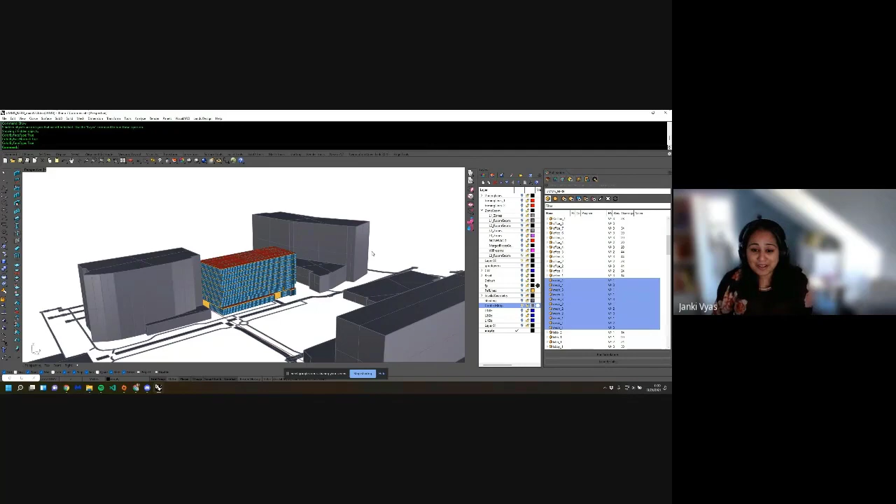Thanks, Trevor, for sharing this project. I'm going to save you from continuing to share your screen, but there's a question here that's more general to the Pollination platform: how do you manage local project standards in such simulations? For example, ventilation in some countries requires building volume to be multiplied or increased by a certain factor. So do you have to do this math yourself, or does Honeybee know the empirical formulas that need to be applied?

I can start answering this. Generally speaking, you are responsible for building your model when using the tools. Is it possible to make those changes? Yes. For this question, what you're talking about is setting up the room properties, which you can do from inside the Rhino plugin, Revit plugin, and also the Ladybug Tools Grasshopper plugin. But if the question is whether, based on your location, we automatically implement standards into your model - no, we do not do that.